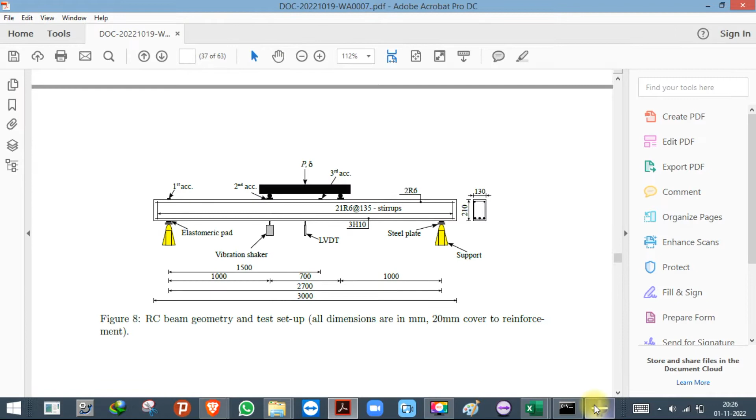We'll work in mm, not in meter. Continue it. What is the dimension? 210 by 130, 210 by 130. So our beam is ready. Beam length is 3 meter.

Then we need reinforcement bottom 10 mm. We'll use wire planar.

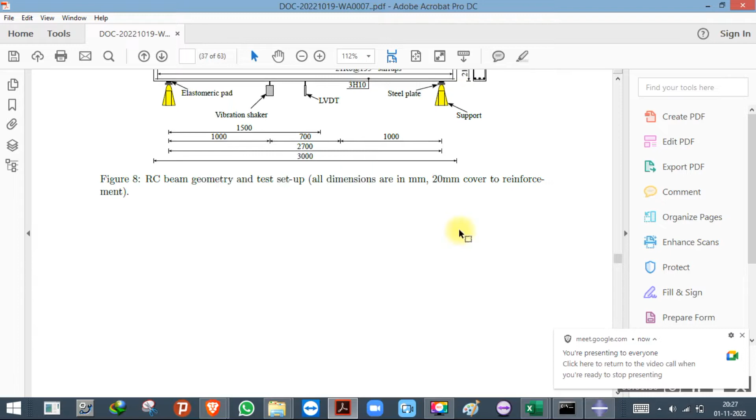Now for length of reinforcement we need to get the side cover. Can you tell me what is the side cover? 20 mm cover to reinforcement. All dimensions 20 mm cover to reinforcement. Bond, can you tell me what is the cover? Side cover? Okay, we'll take 20 mm only for side as well.

So the length of the reinforcement would be 3000 minus 40. So it will be 3000 minus 40, that means 2960.

So another one, same length, just 6 mm. So I've made 2 reinforcement bars. Then I need to make stirrups.

It will be also wire. And as there is 20 mm cover, so 20 mm cover to reinforcement. Then this will be 210 minus 40. It will be 170, right? 170 by 90, 170 by 90.

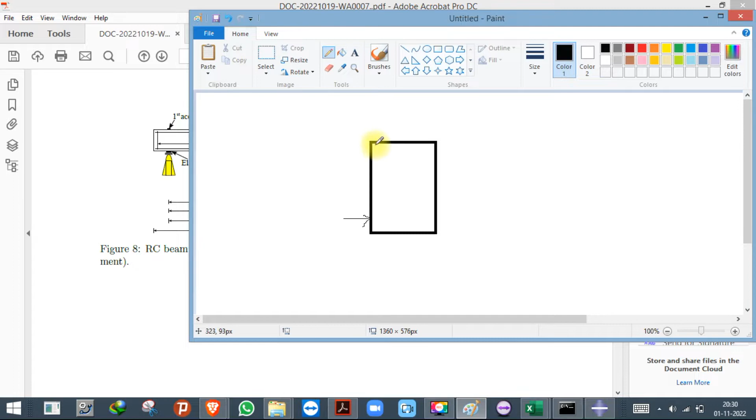And if this is a clear cover or effective cover, they have not mentioned. So if I am considering the clear cover, then in that case, if this is the reinforcement and if cover is from face, and I am making center line diagram, so diameter of reinforcement, diameter of stirrups is 6 mm. So what I'll do is, the diameter is 6 mm.

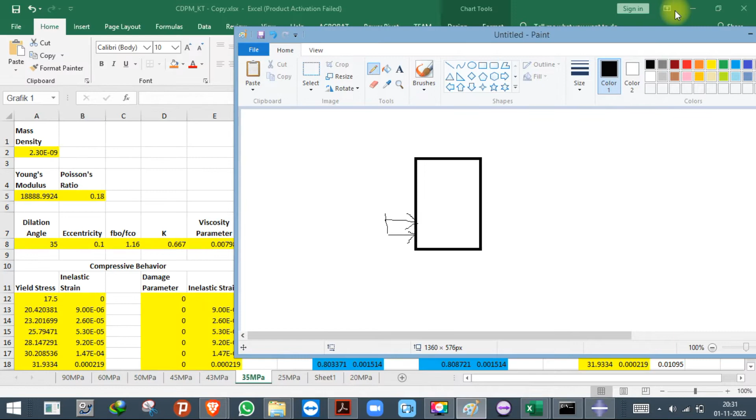20 plus 6. Okay, let it be effective. So this is 90 and this is 170. 90 and 170.

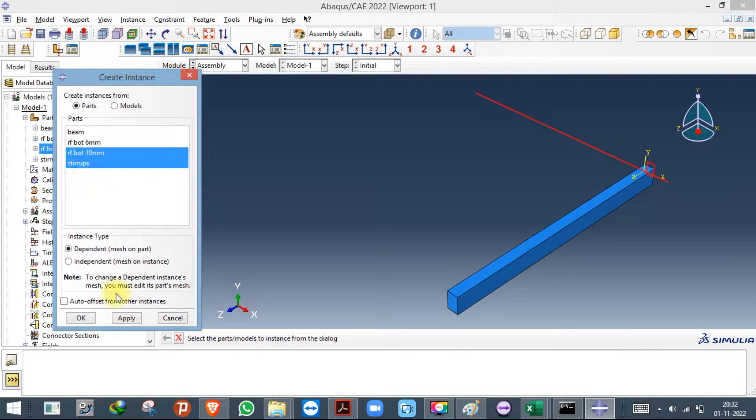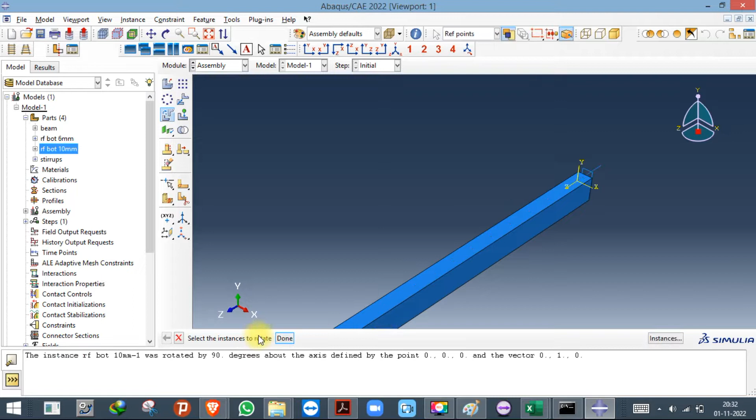So first I'll bring the bottom bar along with the stirrups. Now I need to rotate the bar. I'll rotate this one, about the y-axis. So first point was 0 0 0. Next point any value in y-axis, 0. Rotate it 90 degrees. Now yes.

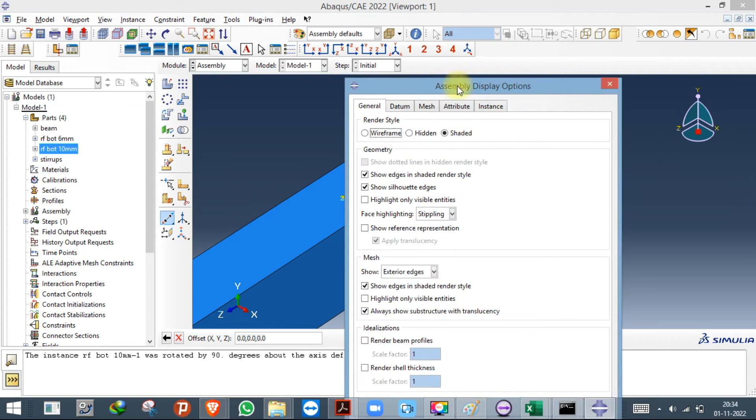Now the diameter of reinforcement is 6 mm. Sorry, stirrups is 6 mm and diameter of bottom bar is 10 mm. So first I'll hide this beam.

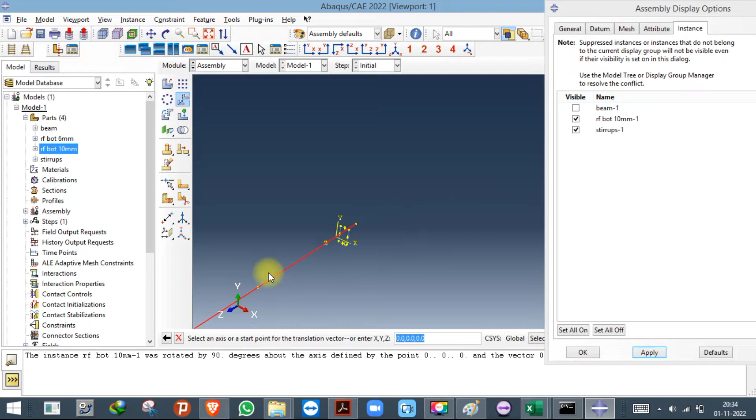I'll bring the center of the bar at this point, and there are 3 bars. Does they have given the spacing? No problem.

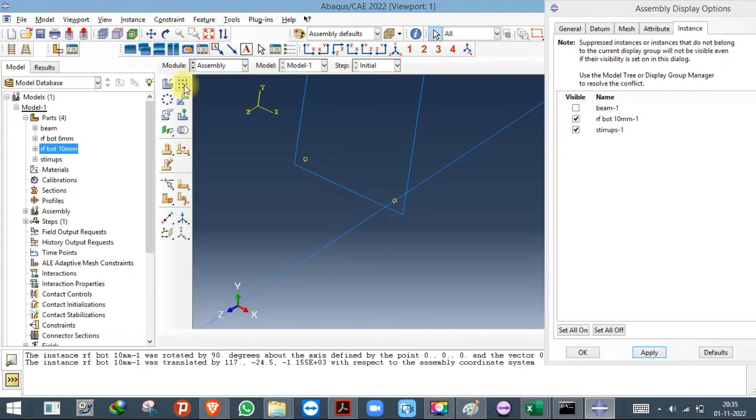Similarly again I'll create a point, 8, y will be 8, z will be 0. I just need 2 more bars, so I'll pattern it. So I've created 2 more bars.

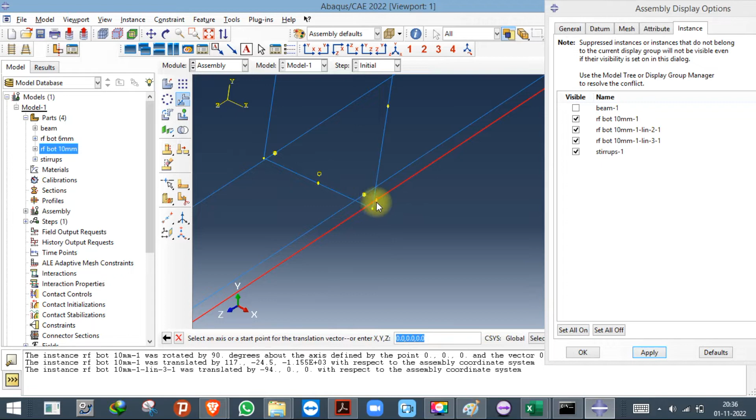Now one of this I'll place exactly at this point, and other one I'll create a midpoint between these two. And then I'll translate this bar, this point to here.

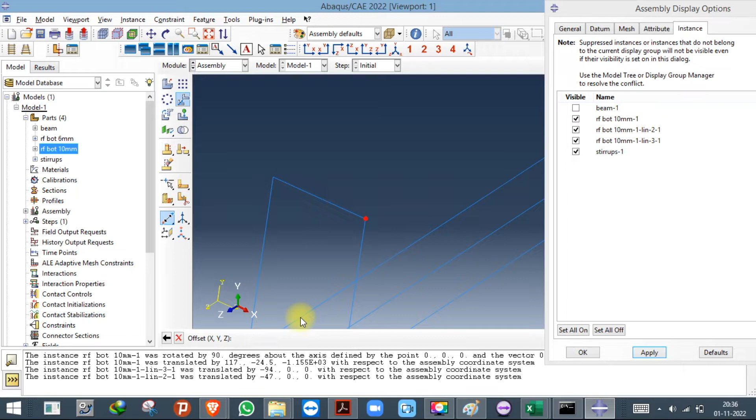Now just let me check top bar. Top bar is of 6 mm dia. So offset from this point will be for top bar, 3 mm for stirrups and 3 mm for main bar. So it will be 6 mm minus 6x and y will be minus 6, z will be 0. Similarly from this point also let me create 6x, y will be minus 6, z will be 0.

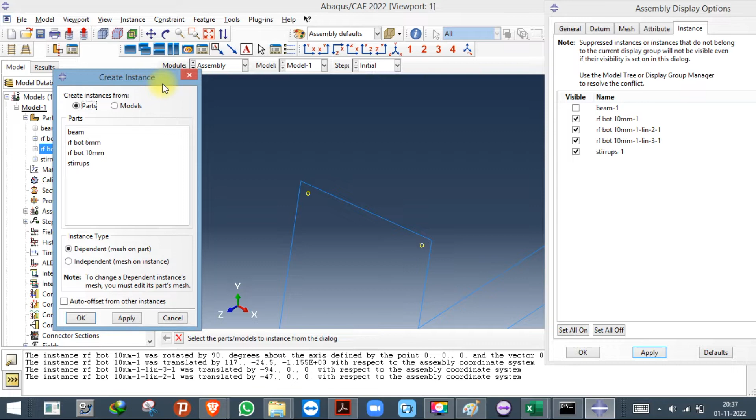I'll bring the smaller diameter bar and then rotate it. I'll rotate about y-axis. What happened? Somebody have left. Okay, so it's done.

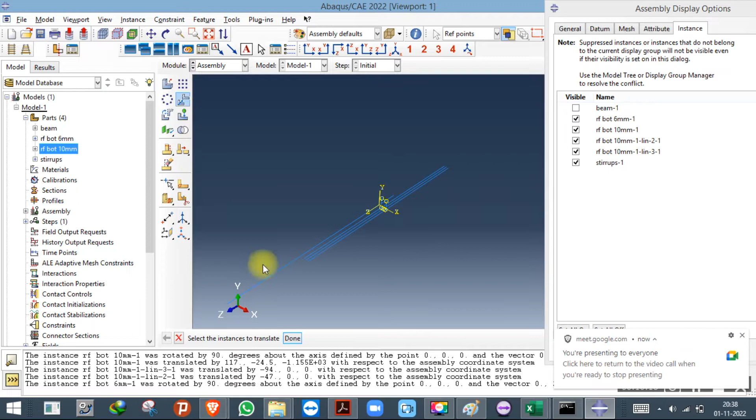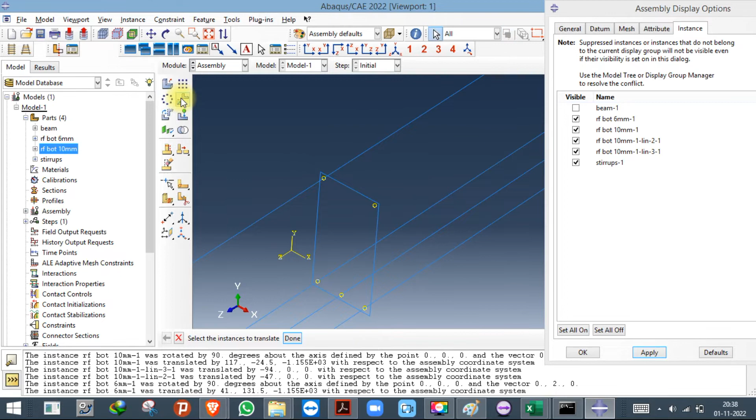Insert this bar, here. Next, I'll pattern this bar because I need two more bars, sorry, one more bar.

So I'll simply create only one more bar, and I'll place this bar, here to here. Now there is a gap between stirrups and bar, if you see clearly, that is there, but once we assign the section, this gap will not be there.

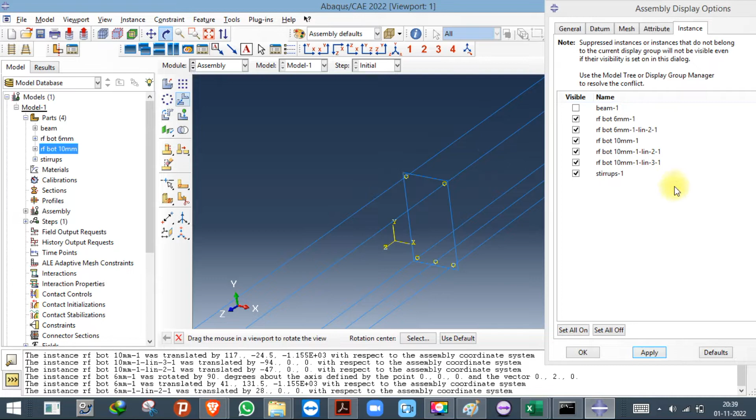Now let me make the model 135 mm stirrups spacing. So pattern this one, I'll choose this direction, I'll reduce this. This is 135 mm. Keep on increasing until it reaches the end point.

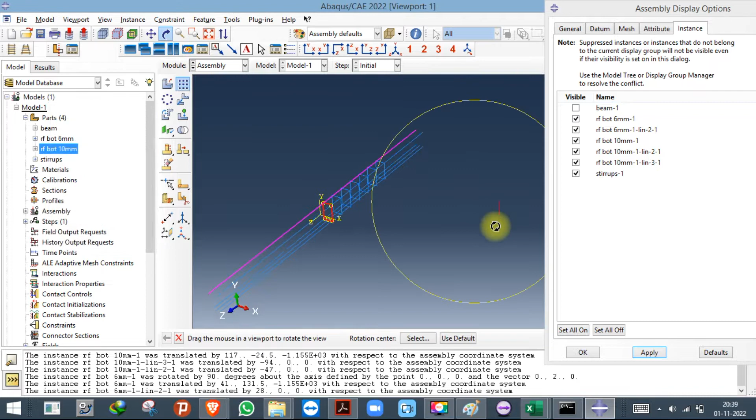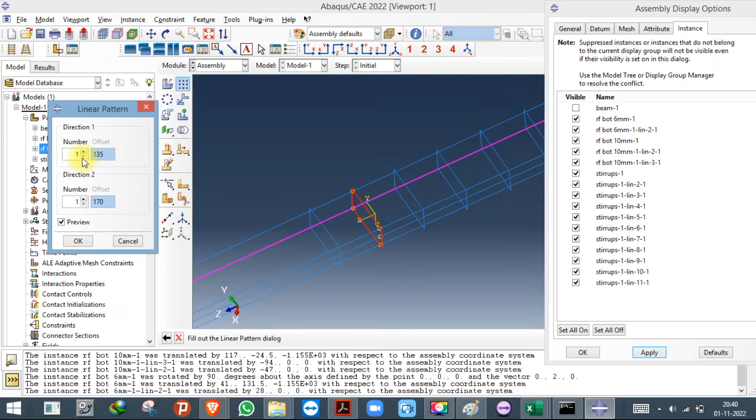Okay, so I guess bars on either side, 135. I'll give the number 11. So if I increase one more bar on this side, now what I'll do.

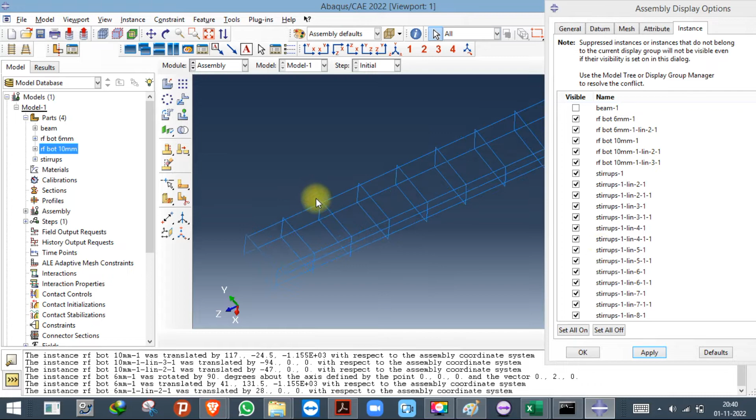I'll get the midpoint of the stirrups, only for stirrups. So midpoint of the stirrup is this. This one is the midpoint of the stirrups, and for reinforcement bar, this will be the midpoint, because I have already placed at the mid.

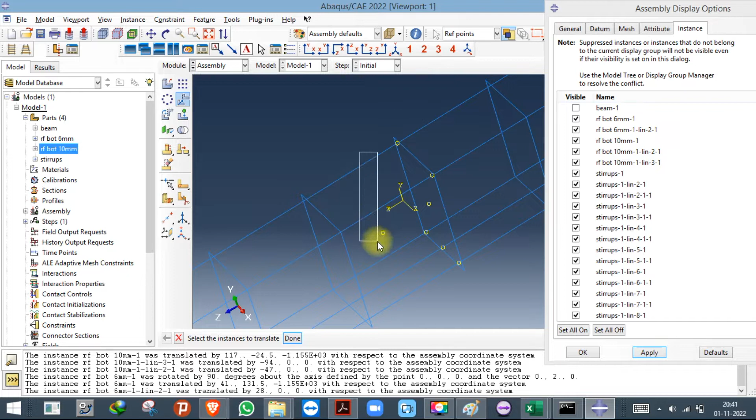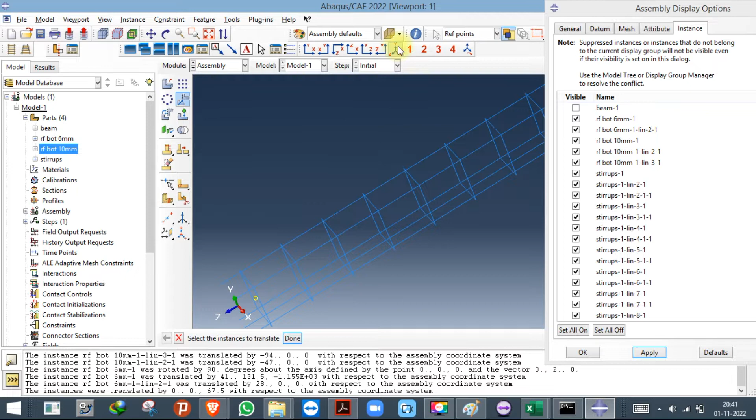So what I'll do, I'll simply select all the reinforcement bars and I'll coincide their center. So if you see, on either side we have minimum spacing. So total, I guess 12 plus 11, 23 bars, 23 stirrups. So our stirrup is ready.

Now first of all, I'll make the constraint. I'll go to interaction and I'll use embedded constraint. Select this one. You can select whole model.

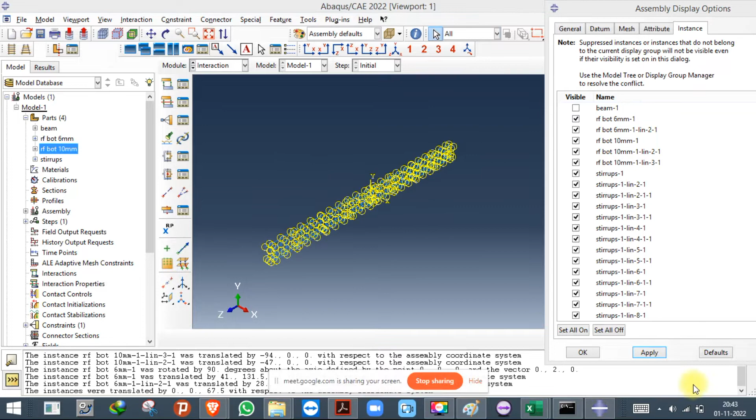So now I'll use the embedded constraint. I'll select the whole model. So you have a share screen. Okay, embedded constraint has been created.

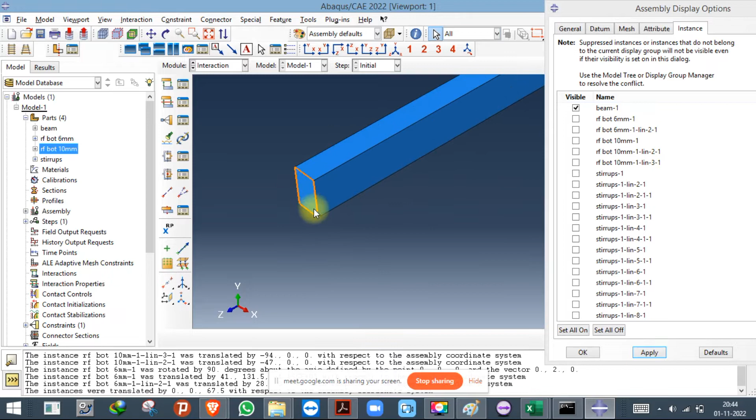Now I'll switch off everything. I'll switch on just the beam, because now I need to place the reinforcement inside the beam. As I have considered 20 mm cover from either side, alternatively what I can do is simply create a center point for this beam also.

So this is the point, and this is the point. So I've got the center point for the beam. This is my center point for the beam. Make sure you do not make any mistake in selecting the center point. This is the center point.

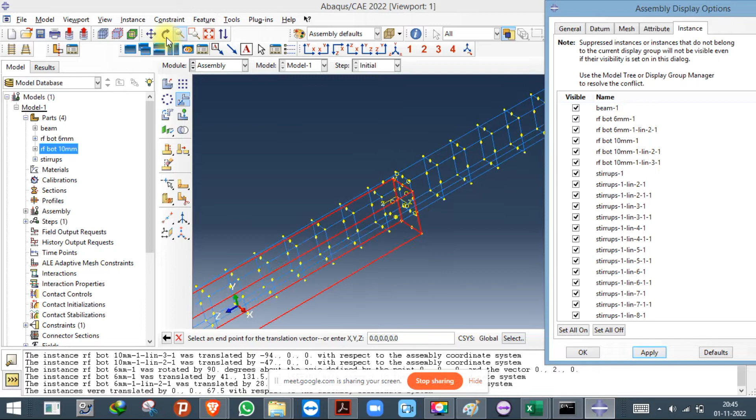So I'll simply drag this center point. I drag the beam using this center point to the center point of the stirrup. I'll switch on everything, and if you see properly, this is the center point for the stirrups.

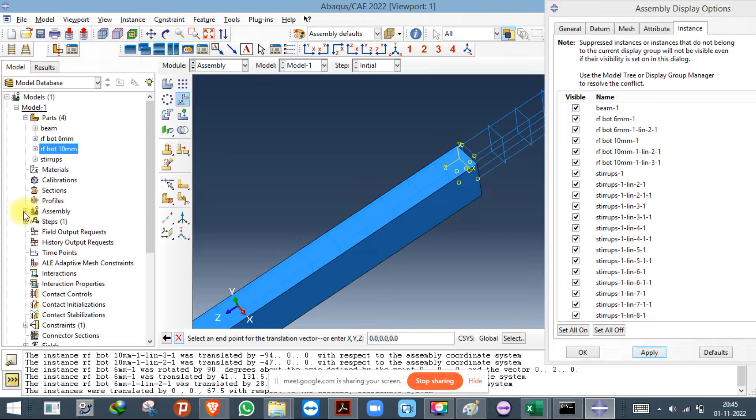See, there are so many points, so I'm getting confused. What I'll do is delete all the previous points - I can go to assembly and feature and delete all the data points, which will clear all the data points or simply suppress them. Now I was getting confused, I could not recognize which one was the center point.

Now I'll again switch off everything. I'll switch on only the beam, and I'll create the center point for the beam. I'll switch on everything, switch off the beam, and I need to get the center point.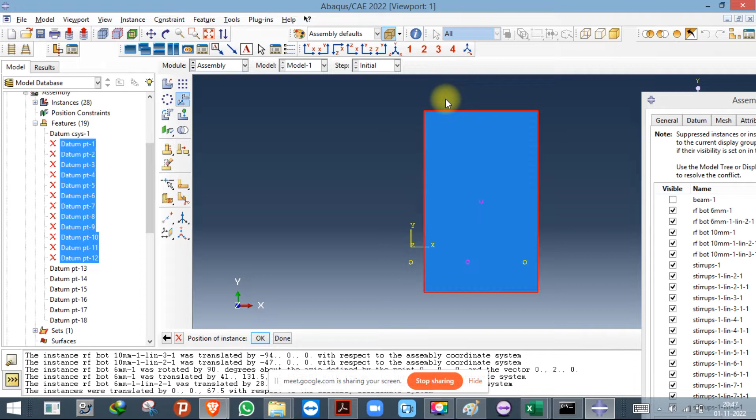Now if you see the front view of the beam and give a transparent look, you can view the reinforcement. Click OK. Now see, the reinforcement has been placed exactly at the center. You can check at the side view or top view.

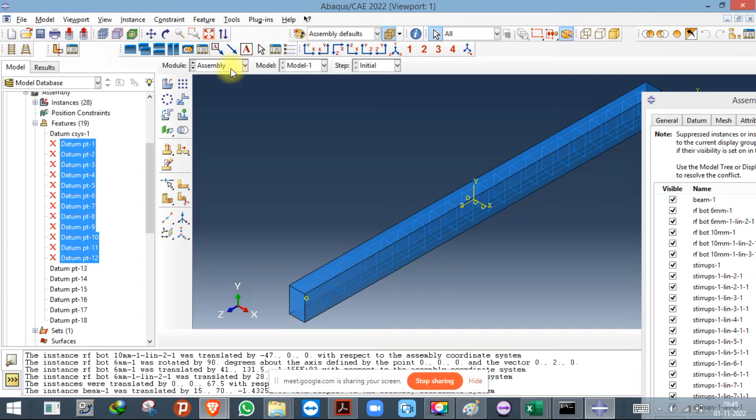You can delete all the points. Now let us get the support point, at which point it has been set. From either end at a distance of 2700, meaning at a distance of 150 from either end, the supports have been placed.

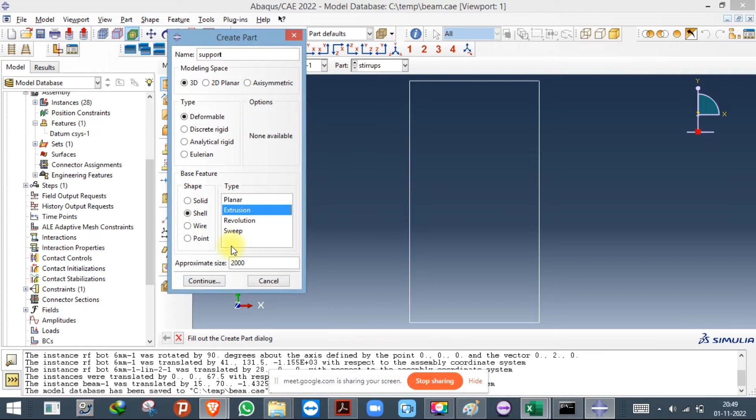Now I can simply create a support. Extrusion. I'll use a circular part. I'll give a random diameter because here they have used a random diameter.

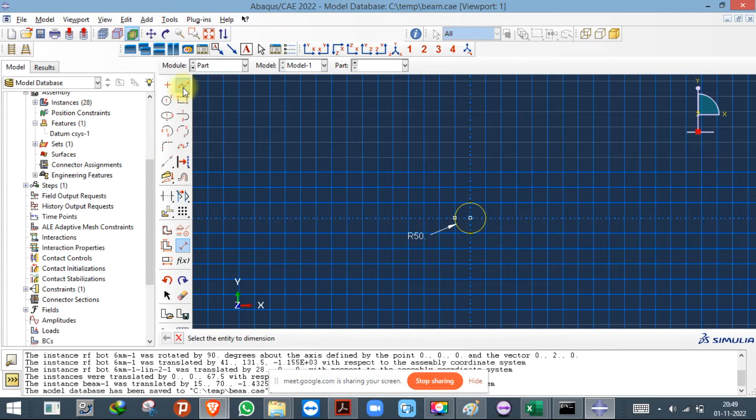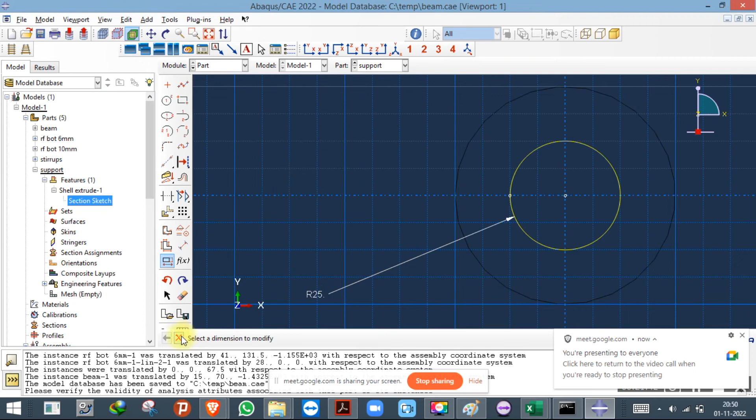Let us take 50, and it is 130. If I bring it over here with an auto offset, the support has become too big, so I'll reduce its dimension, and also I'll edit it and make it discrete rigid. So I'll reduce the dimension and make it 25. Feature, regenerate, assembly. Okay, this is okay.

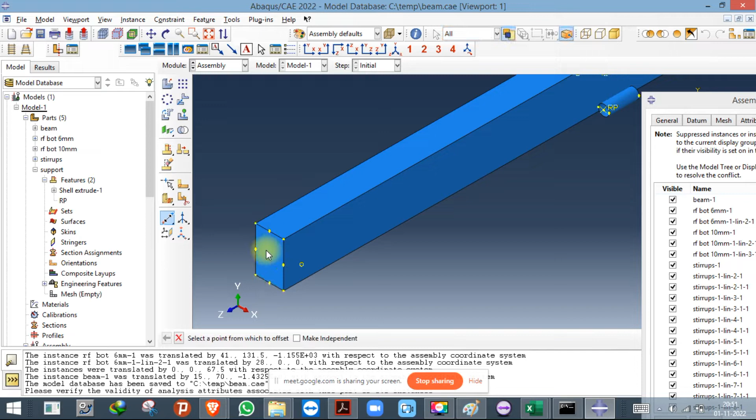I'll assign a reference point. Go to assembly. Now from this point, x is 0, y will be 0, z will be 150, minus 150. Just I need to put a support, and I don't know why there is so much network issue.

Okay, so now for the top loading point, it is 1000 mm from a support. That means it will be 150 plus 1000, 1150 from one end. So this point, x is 0, y is 0, z will be minus 1150. Okay, now

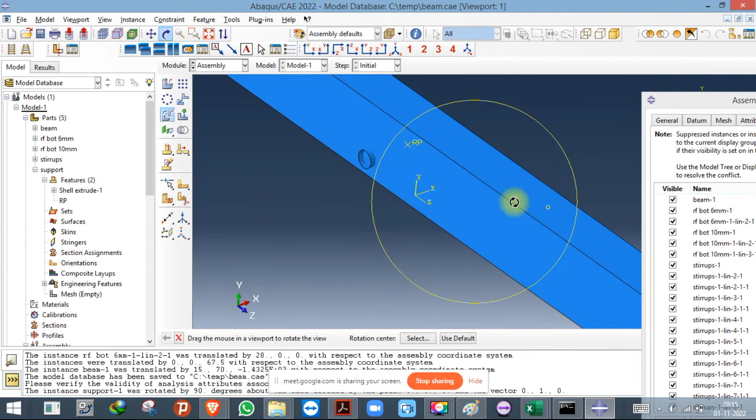I'll have to first rotate it, then rotate about the y-axis. Press enter, 90-degree rotation, done. Now it has got inserted somewhere inside. I have to bring it outside.

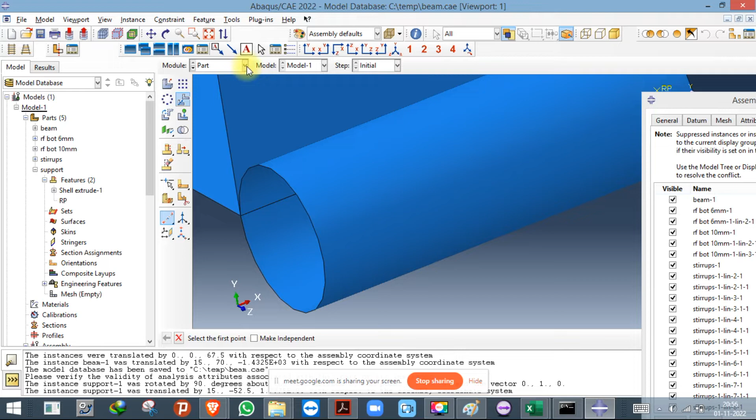Now see, I need to place it at the bottom, so the top point of this cylinder should be at the bottom of the beam. So I need to create a top point, and I'm not getting any point at the top. So what I'll do is partition it so that I can get a point at the top - partition of shell using partition of face, using a datum plane.

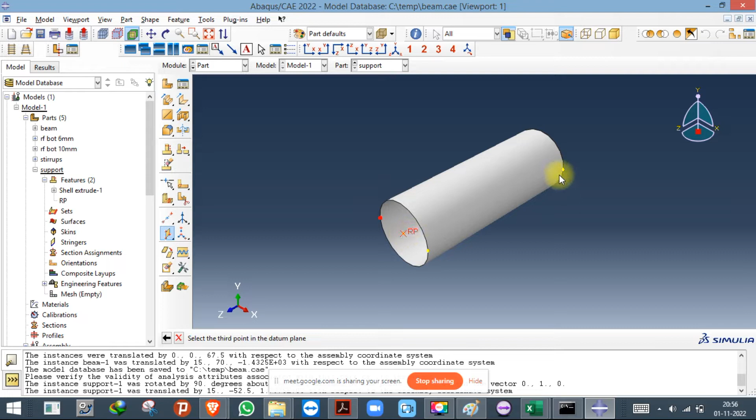For that I'll create a datum plane using 3 points - first, second and third point, and partition this face using the datum plane. It is asking me to select a datum plane, I'll select this one. Partition created. Again I'll create a datum plane, a vertical datum plane, using 3 points - 2 points on one plane and 1 point on the other plane. Now again I'll partition it using the datum plane.

It is asking me which face I want to partition. I want to partition the whole face, and using this datum plane, create the partition. So we're good to go. Now if I bring it into the assembly, see, I've got a point. Now if I try to translate it, then I'm getting a top point.

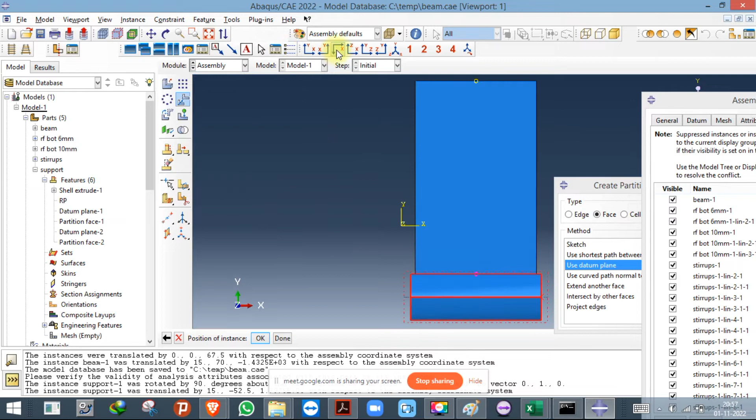I select this and I select over here. Now if you see the front view or side view, it has been placed exactly at the bottom. Good.

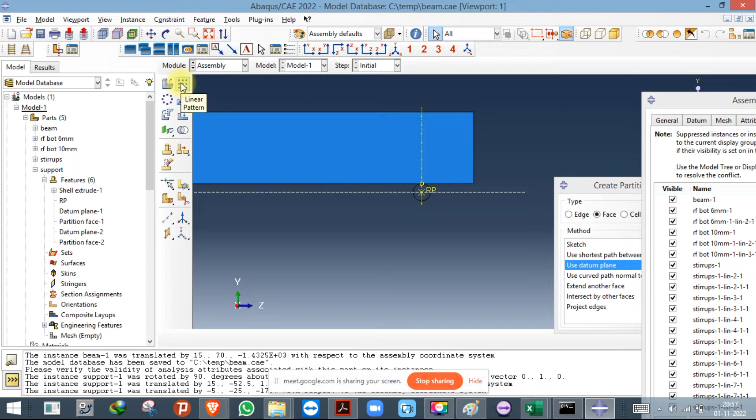Now I'll make a copy of this. Supports are at a distance of 2700, and for the vertical one, what is it - 25 and 130, 135, 145.

25, 145 plus one more 25, it will be 170 - not good, I just want two more. Okay sorry, it was 210. So 210 plus 50, 260. Okay, 260 exactly at the top, but we have to place it at a proper location.

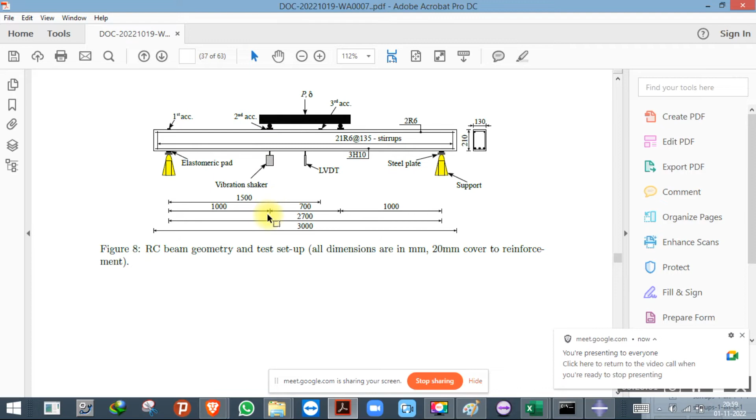Now we placed it but not properly. So from this support, the distance of the first loading point is 1 meter, so it is 1000. It is just flip the direction.

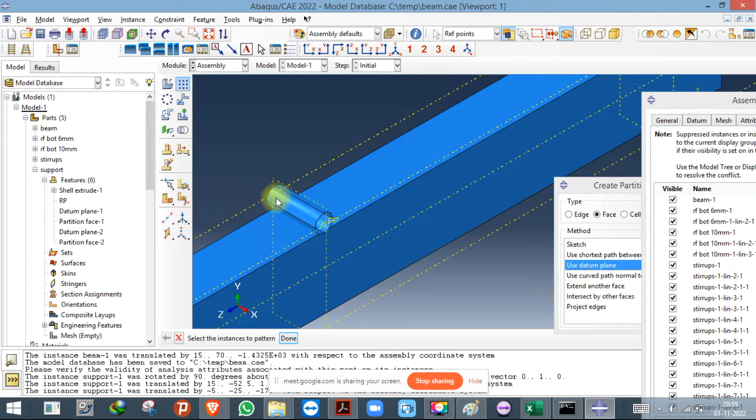Perfect. And again I need another copy of this in the same direction, but at 1000 - I don't need this one. So the loading points have been defined. These two are extra, so I'll delete these two - I'll delete this one and I'll delete this one also.

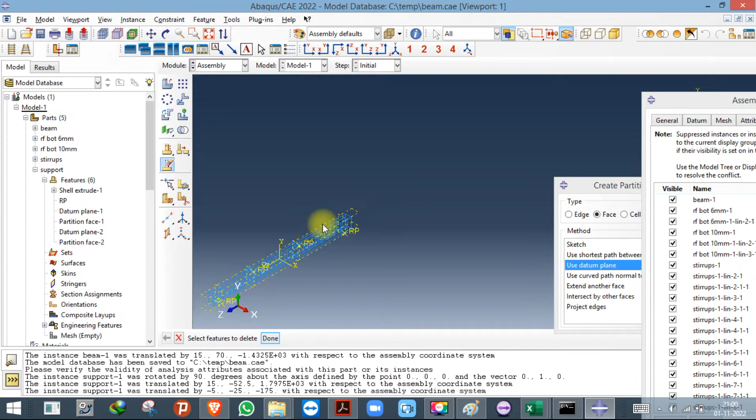Now for this simulation I'll go for static analysis. It will take some time for the simulation to complete.

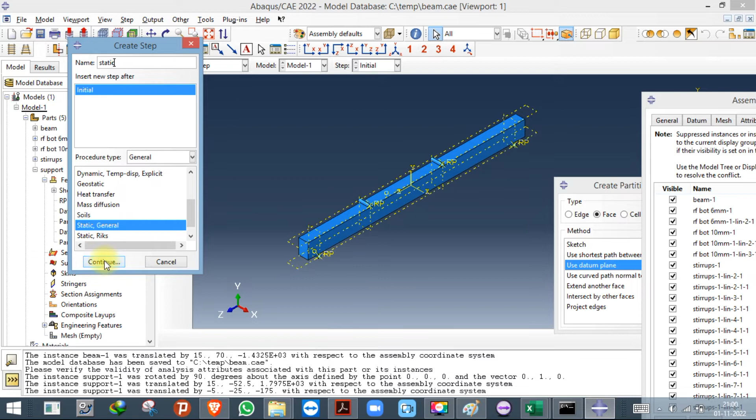Now in load, as I don't need all this, for the time being I don't need strain etc, I don't need contact etc. But what I'll do is I'll select the damage parameters.

Here I'll go for spaced time interval and I'll ask for 20 outputs, or I'll ask for 30 outputs, that's okay.

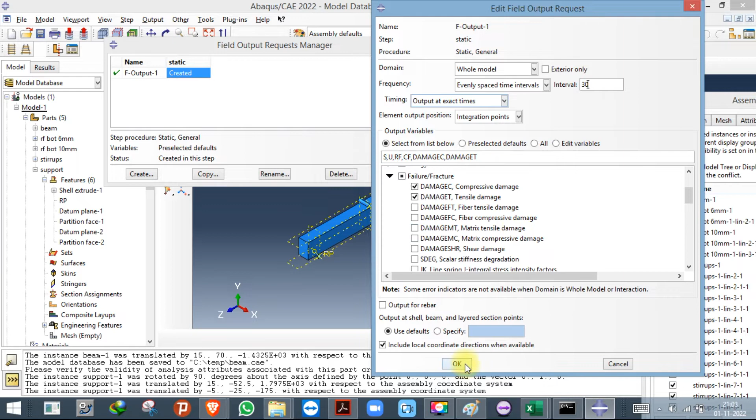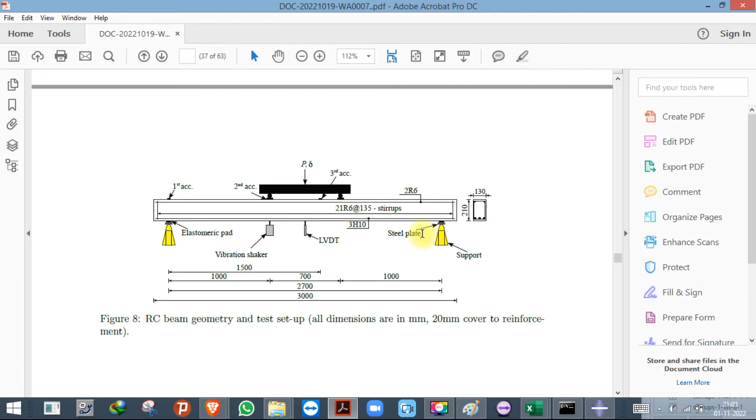And for load, here we just have to follow the boundary condition that they have used. So elastomeric pad steel plate, or simply supported.

So I haven't gone through the papers properly. I should have, no problem. For the time being I'll keep it a roller for both ends. But we have the support on which these beams are resting, so I'll fix the support, and on this support the beams are simply resting.

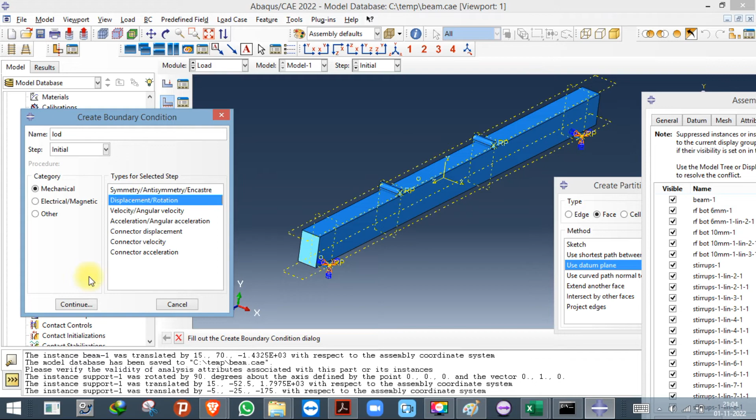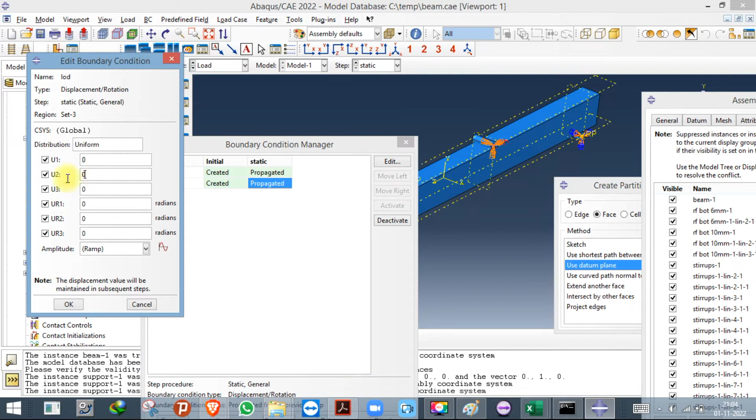And for load, this is my reference point for load. And then load in U2 direction, and apply a displacement of -30. In U2 direction a displacement of -30.

I just have to go to mesh before applying any property. So for the part, use the default mesh and see - no, this is not good. I'll use 5 mesh size. This is quite good. For beam, if I use default mesh size, it will be too high.

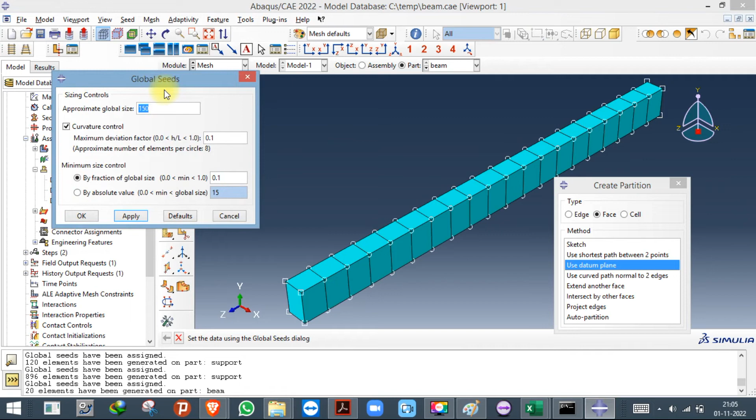50, okay. For reinforcement, go for 50 only, and change this reinforcement type to truss.

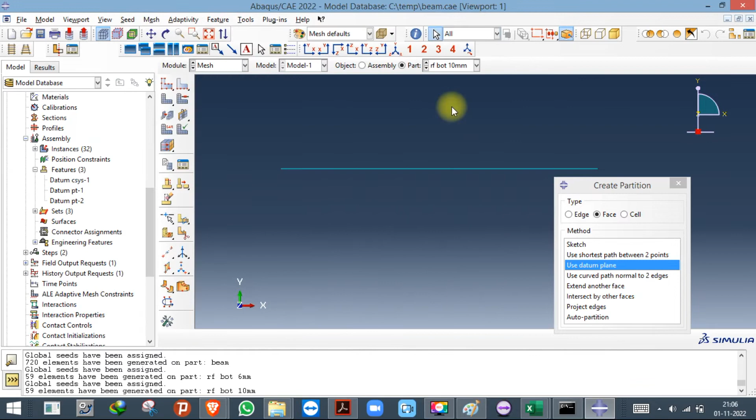One more thing, I just have to find out the set. Set 2 is my support and set 3 is my loading. So I'll go to set 2, which is my support, and request history output. Set 2 is my support, so in support I'll only get reaction force, RF2.

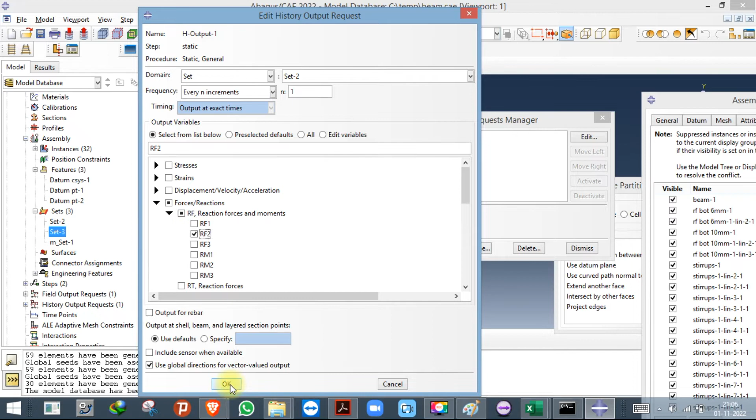And I'll copy this. Here I'll change the set to set 3. Here I'll get reaction force as well as the displacement, so we'll be able to plot load versus displacement curve.

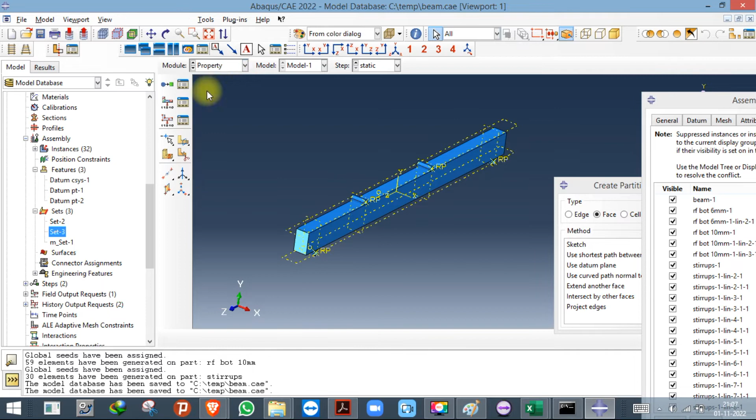So this model is completed in every way except for property. For property, let us create a material: concrete, density 2500, elastic modulus e to the power -12 ton per mm cube. Whatever I have in the Excel file, I'll enter that data directly.

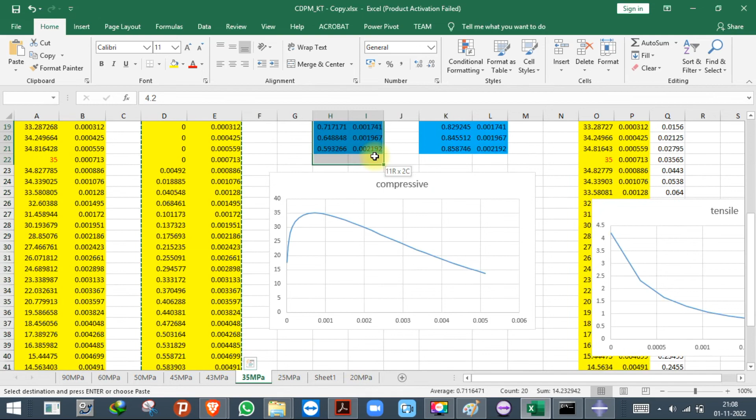Then go to plasticity, concrete damage plasticity, enter this data. Compressive behavior - we'll go for the damage also. Tensile behavior. Tension damage. Click OK.

So all the data have been defined. Click OK. Steel - density is given -12.

Elasticity and plasticity - for that, I guess we have saved something. Yeah, for 6 bar you have a different value, so I'll rename this again. I'll click OK, okay, I'll enter it for 6 mm: 393.6.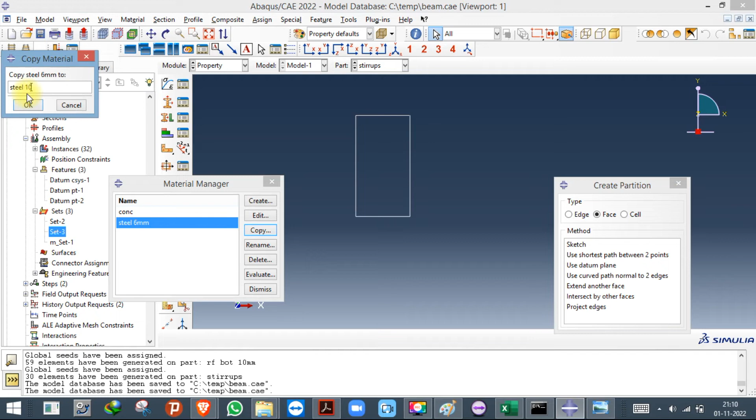So this is steel 6mm, and I will copy the same material and name it 10mm. What I have to do is just change the elastic value, which is 199.2 to the power 3. Plastic 540.8, and let us give it an ultimate strain of 800 and 0.3 strain.

So we have defined all the properties. Just have to create the sections - 10mm bar, beam, truss. For 10mm bar, cross section will be 78.54, that is 0.7854 d square, π/4 d square.

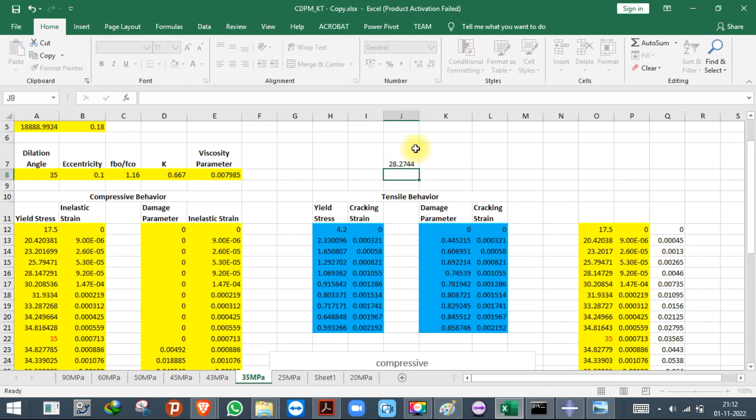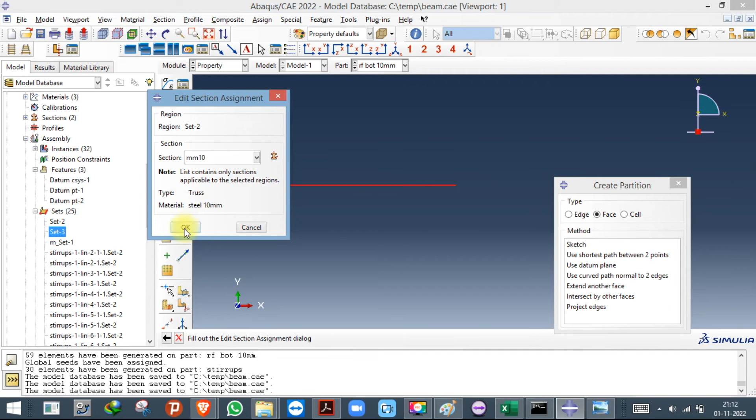And for 6mm bar, just find out the area. The area will be 0.7854 into 36, 28.27. Simply assign - this will be 6mm, this will be 10mm, again 6mm.

So we are done with everything. I just have to define our interaction. I'll switch off everything, or let it be, everything can be there, and simply use this one - find contact pair. It will automatically give you the contact pair.

Go to property, create a property. Give tangential behavior penalty a value of 0.1, and normal behavior hard contact.

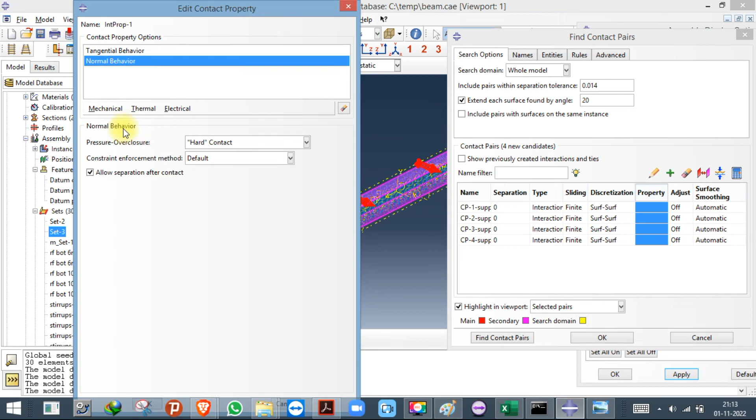Your model is ready, I'll simply submit the job. I have 4 processors, so I'll use all the 4, so it's faster. Submit the job.

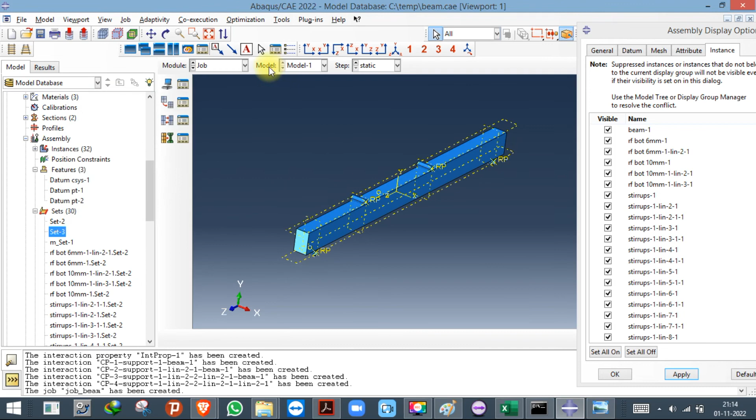Okay, sorry, I have forgotten to assign the property for the beam. So I'll assign the property - I'll create it, it will be solid homogeneous. Okay, click OK.

So everything is done, just submit the job and you will get your result.

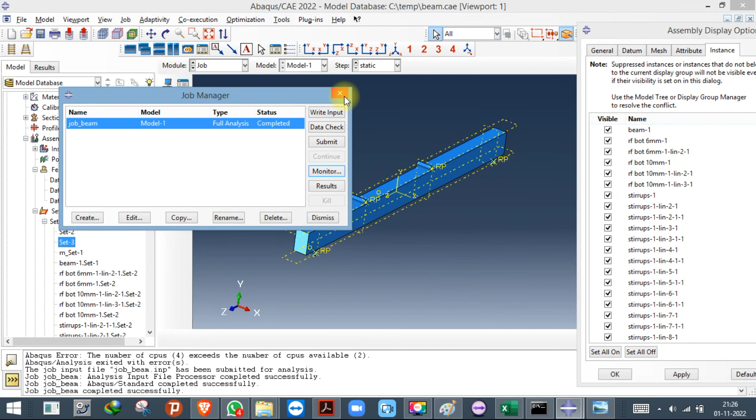Okay, the analysis is completed. I will simply right click and click on result.

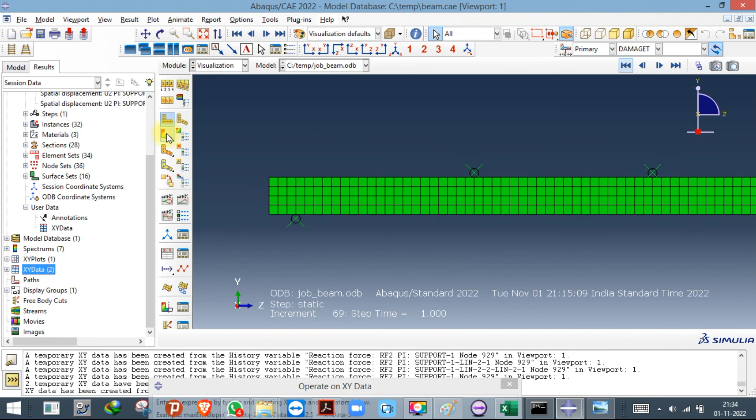So this is the tension crack pattern we have got. To see the bottom tension crack pattern - this is the bottom. From here you can get tension damage and compression damage. So this is the tension damage.

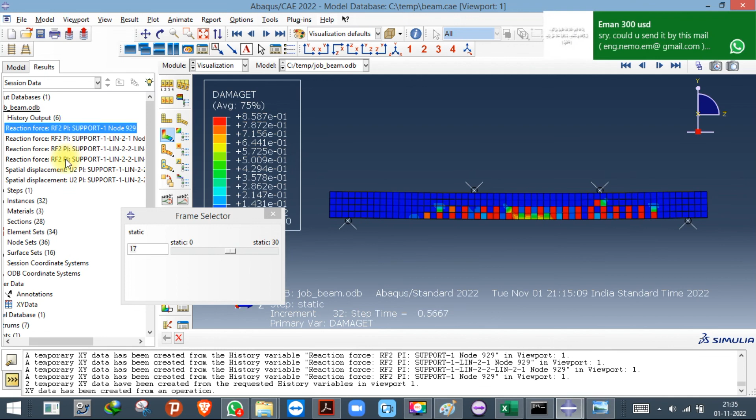If you want to plot load versus displacement curve, simply expand these two and plot the first and this. Right click, plot - once you plot this, the data for load versus displacement curve will be available here. Right click and save both of this. XY data 1 is my force, so this is force, this is displacement.

Sorry, this is force and this is time, so this is not required. Take this data in Excel - force column, and this one is displacement. Right click and simply take this data in Excel, plot the load versus displacement curve, and convert the minus displacement.